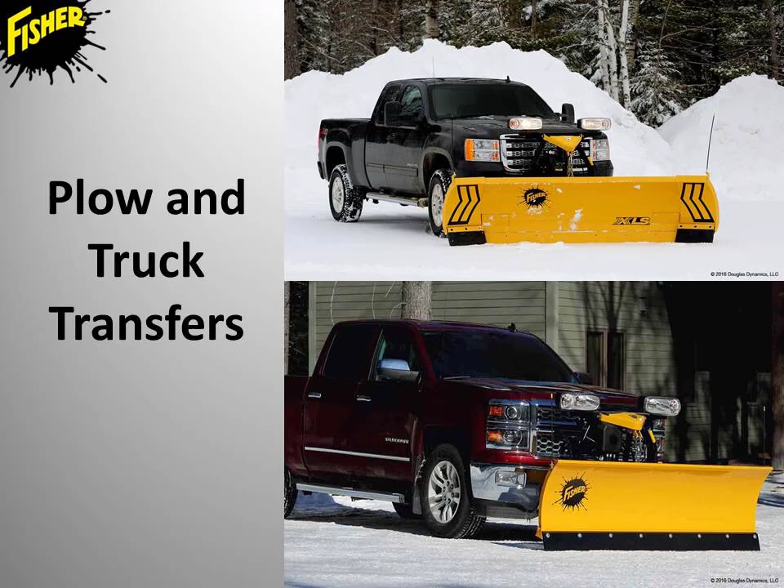Throughout this module, you will learn how to research a plow transfer using the Fisher eMatch system, as well as the many resources available on the Fisher website. This video will cover a wide range of scenarios to assist you with the most common plow transfer situations.

One tool that is helpful and recommended to use during the plow transfer research is our eMatch tool. This tool is located in the upper right-hand corner of the Fisher website.

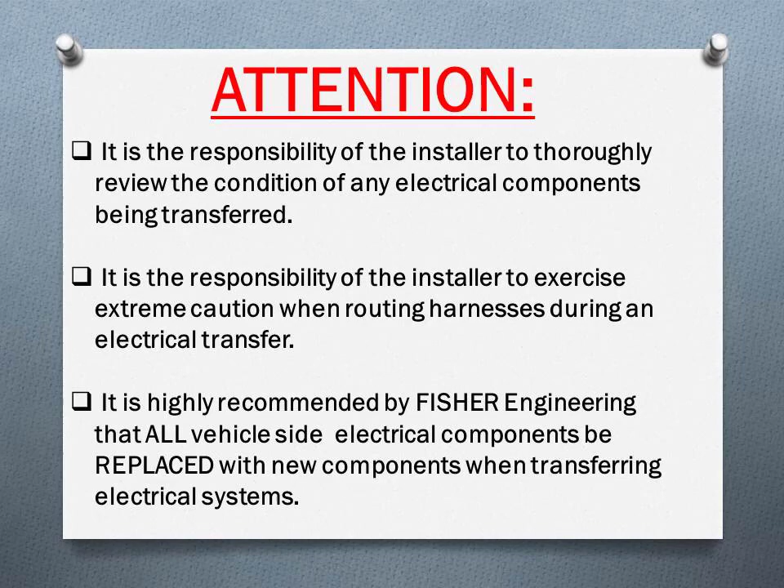It is the responsibility of the installer to thoroughly review the condition of any electrical components being transferred. It is also the responsibility of the installer to exercise extreme caution when routing harnesses during an electrical transfer. It is highly recommended by Fisher Engineering that all vehicle side electrical components be replaced with new components when transferring electrical systems. The components that can vary from truck to truck include the mount, headlamp harness, and isolation module.

Also, due to certain weight restrictions, approved plow applications will vary for each vehicle. It is important to look over these components when researching a plow transfer.

Before beginning, there are a few details you should gather about your snowplow before moving forward. First, it is important to determine what model plow you have, as well as which electrical system it uses.

Questions that you should be able to answer before researching your transfer are: is the plow an original Minute Mount or Minute Mount 2? Please note that a Minute Mount setup will not fit on a 2007 and newer Chevy, GMC, and Toyota Tundra due to the fitting of the headgear to the bumper.

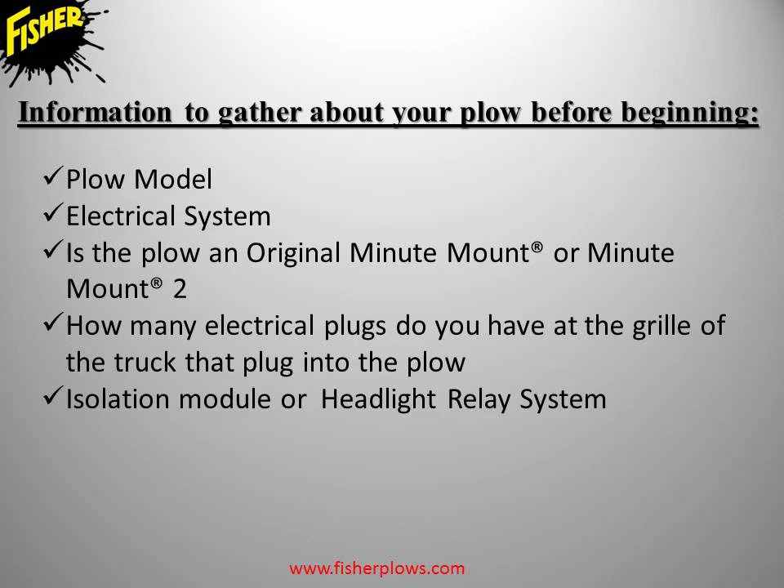Other questions include: how many plugs do you have at the grill of the truck that plug into the plow? Do you have an isolation module system or a headlight relay system? Depending on the electrical system, you will have either 2 or 3 plugs coming out of the grill.

If your system has 3 plugs, it is important to know whether you are using a 3-port isolation module or a 4-port isolation module. A 3-port isolation module has 3 harness plugins, A, B, and C, and the 4-port isolation module has 4. Because the 3-port and 4-port isolation modules differ from each other, they use different headlamp harnesses that are not interchangeable between the two.

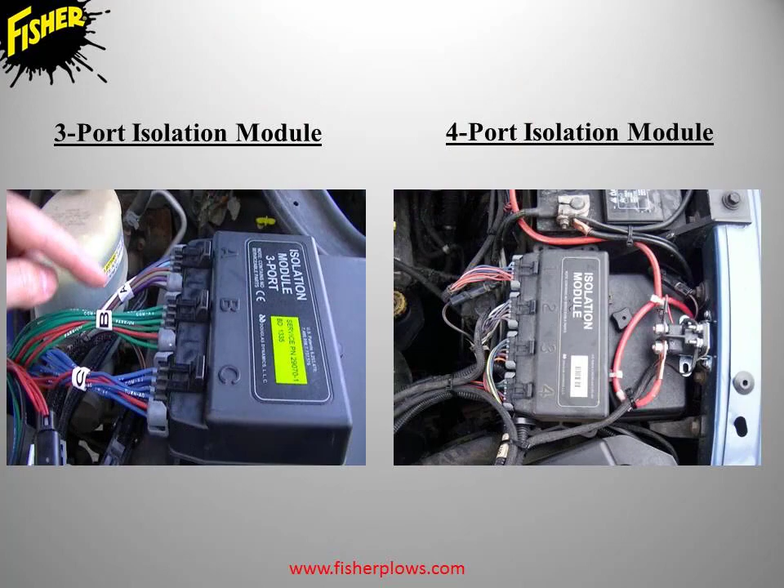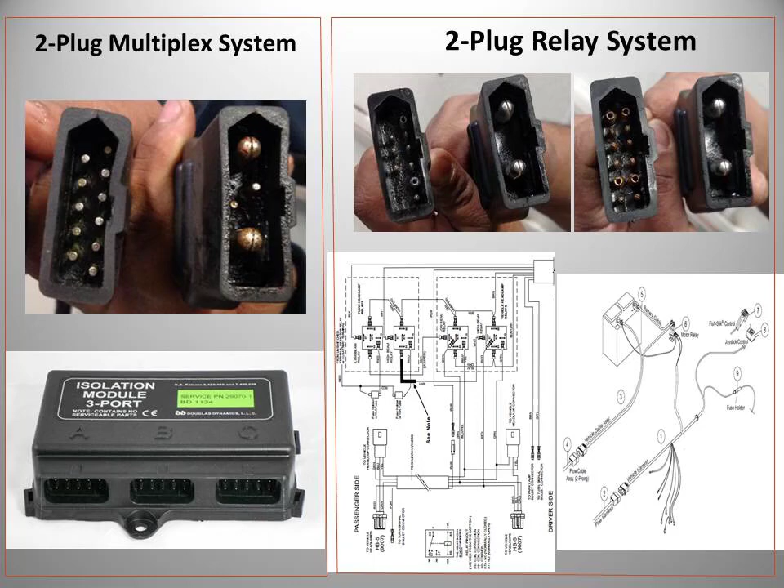If your system has 2 plugs, it is important to know whether it's an older 2-plug headlight relay system or a multiplex 2-plug isolation module system. Some newer trucks with new style lights will not be compatible with the older relay lighting and 4-port module lighting system. In these cases, you will have to upgrade the plow's lighting and electrical system to the 3-port module.

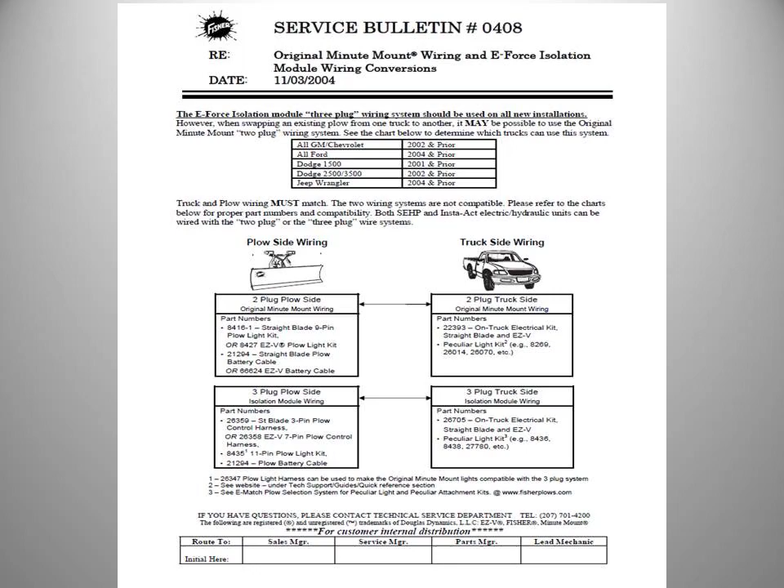Tech Service Bulletin 0408 provides a chart that determines which truck models by year are compatible with the 2-plug relay system. Now we'll go over some of the most common plow transfer scenarios.

Scenario 1: A user has an 8.5 XV2 with a 2-plug, 3-port isolation module system. The user wants to put their plow on a new truck. The plow was originally on a 2005 Dodge Ram 2500 SLT. They want to put the plow on a 2015 Chevy 2500 HD.

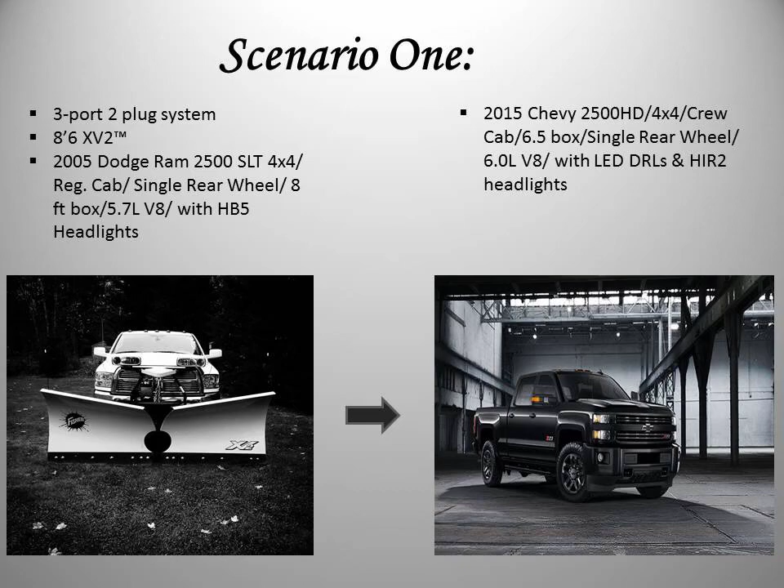This plow transfer scenario can easily be done by using the eMatch system. First, gather the original truck's information and input that information into the eMatch system. When entering the truck's information, ensure that you are checking the build date and weight information of that specific truck, as well as identifying the vehicle's headlamp type.

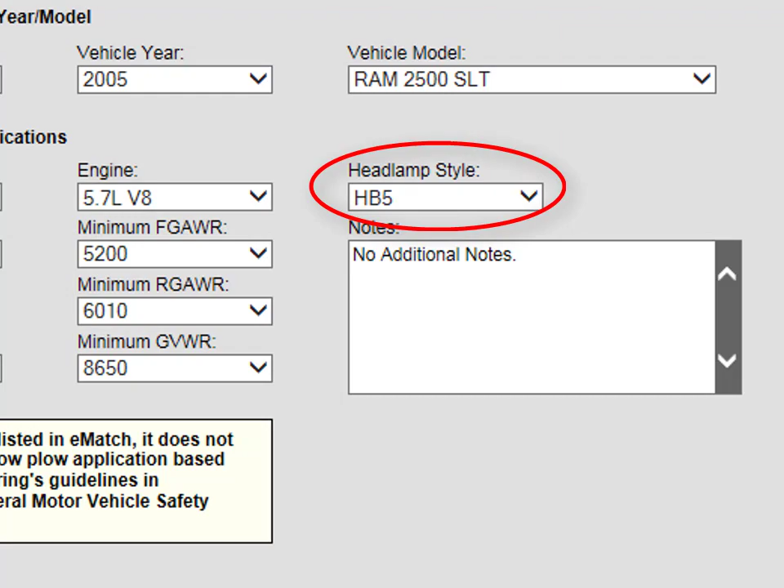After you have entered the original truck's information into the eMatch system, you will be able to gather the part numbers for the isolation module, headlamp harness, and mount. These are the components that vary from truck to truck and may need to be changed.

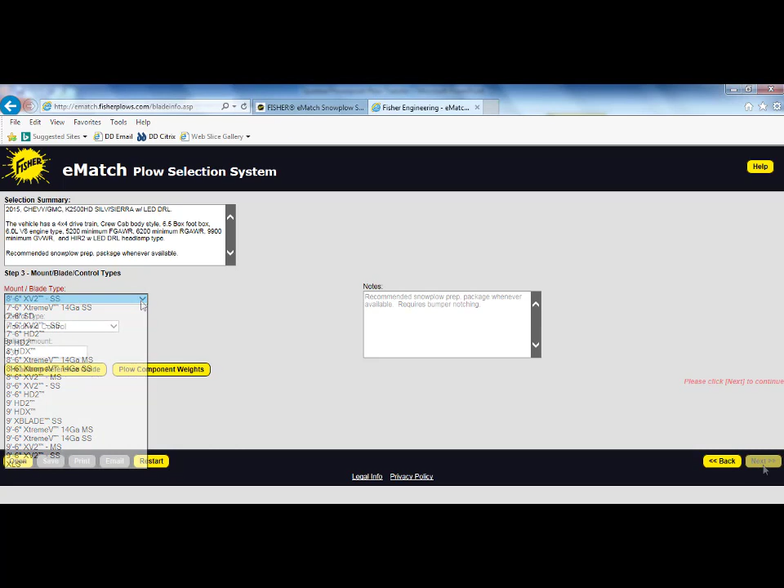Next, enter the new truck's information into the eMatch system. Ensure on the second page that the plow you are going to be transferring is listed in the blade type drop-down. If the blade you are transferring is not listed, then we do not recommend putting that specific plow on that truck. If the blade is listed, then select the blade and control type to move on to the third page.

Check to see if there are any changes in the headlamp harness, module, and mount kit. In this scenario, the module stays the same, but in order to transfer the plow successfully from the 2005 Dodge Ram 2500 to the 2015 Chevy 2500, you would need to change the mount kit and the headlamp harness.

Everything else will transfer over.

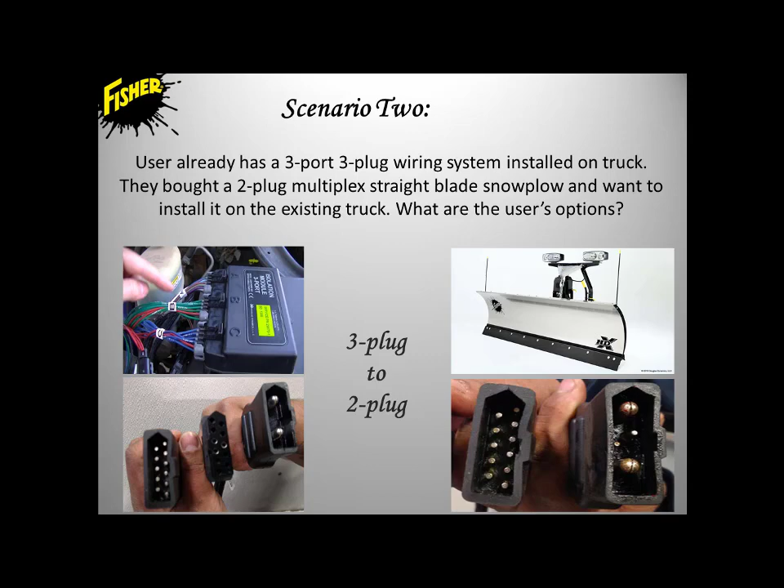Scenario 2: the user has a 3-port 3-plug wiring system already installed on their truck and wants to buy a new straight blade plow that uses the multiplex 2-plug wiring system. This scenario has 3 options.

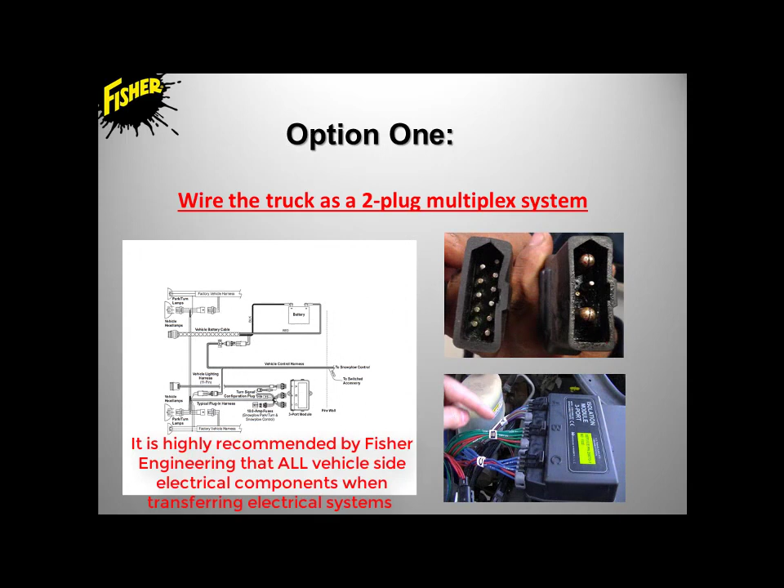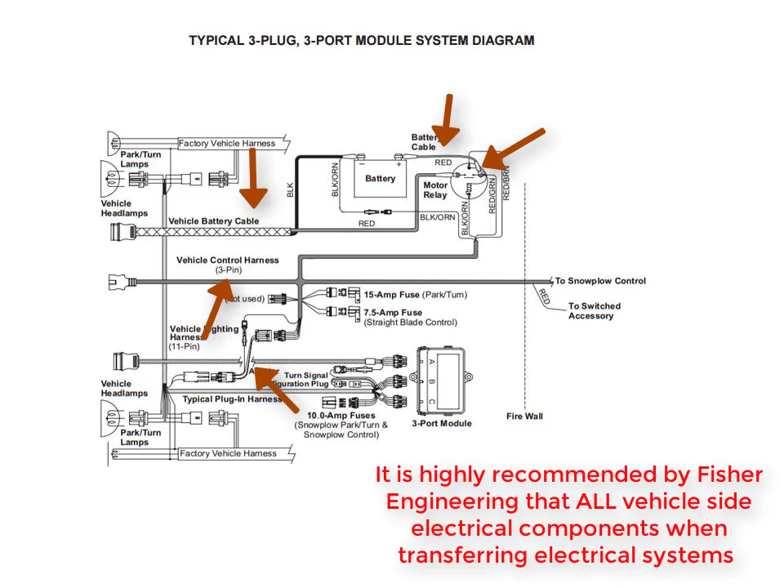The user can wire the truck as a 2-plug multiplex system by stripping some of the vehicle side wiring and installing the necessary multiplex wiring. This option consists of stripping the motor relay, battery cables, control harness, and the 29047 adapter. The multiplex battery cable, control harness, and control would then have to be installed.

The second option would be to use a 49663 conversion kit, which will provide the user with the necessary components to convert the plow side into a 3-plug system. This will make the plow compatible with the truck's original wiring.

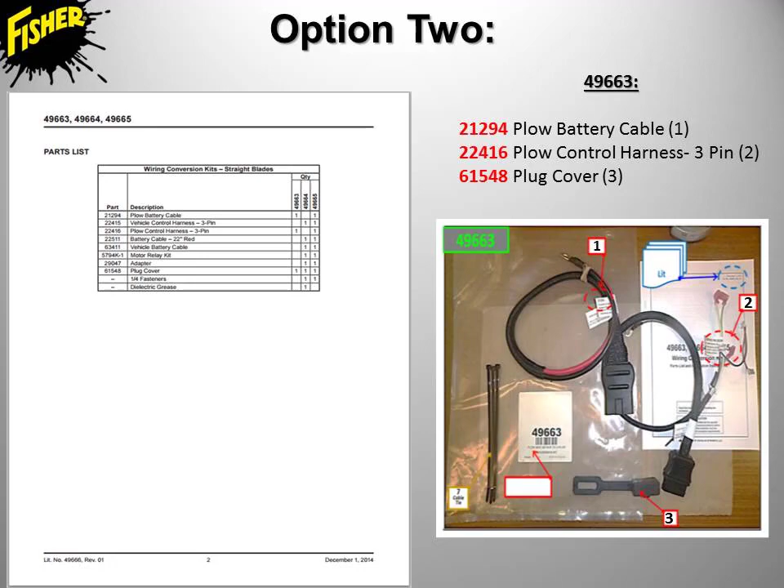The third option is to dual wire the truck. This may be a viable option if you are running both 3-plug and 2-plug plows on that truck.

Scenario 3: the user has a 4-port 3-plug wiring system and wants to take that wiring and plow off of one truck and put it on another. Some newer style headlamps will not be compatible with the 4-port module lighting system, so understanding what type of headlights the new truck has is important.

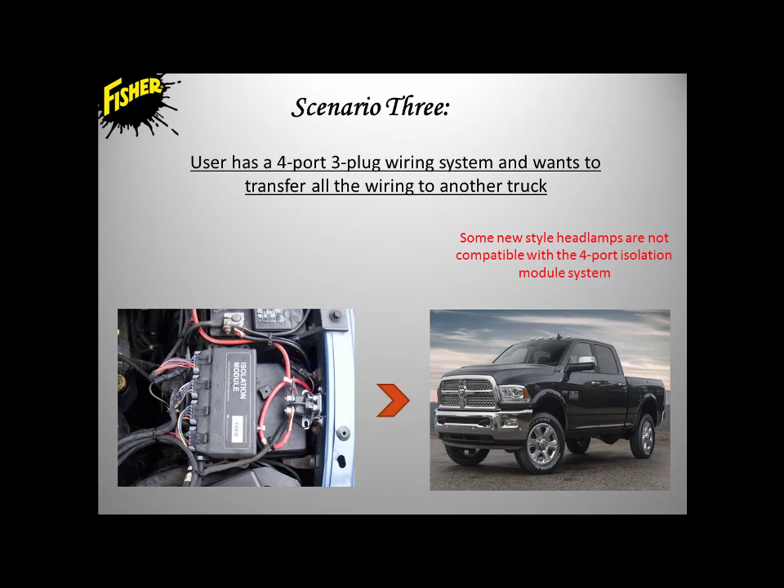If the headlights of the original truck are the same as the new truck, then you will be able to transfer everything over to the new truck. If the headlights differ from the original vehicle to the new vehicle, then we recommend updating the vehicle's lighting system to a 3-port 3-plug system.

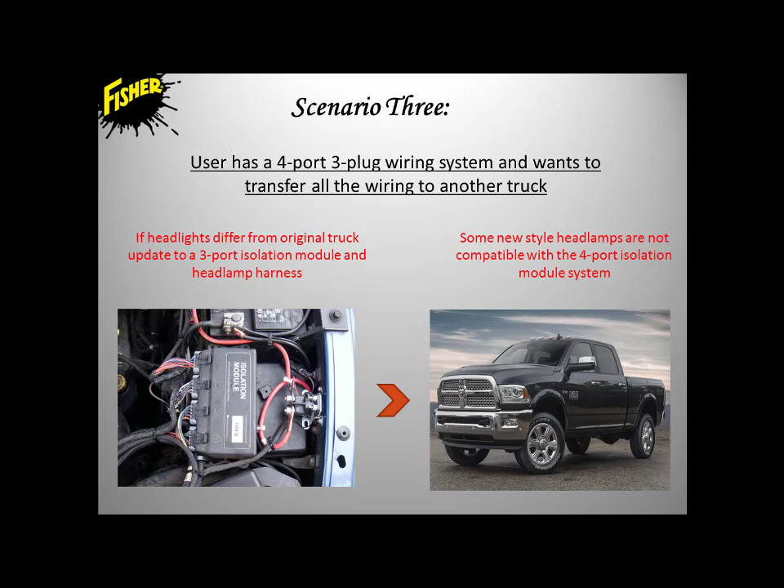This information can be found by inputting the truck's information into the eMatch system.

Scenario 4: the user has a 4-port 3-plug electrical system installed on their truck. The user purchases a new 2-plug straight blade Fleet Flex plow and wants to put that plow on their existing truck that is wired as a 4-port 3-plug system.

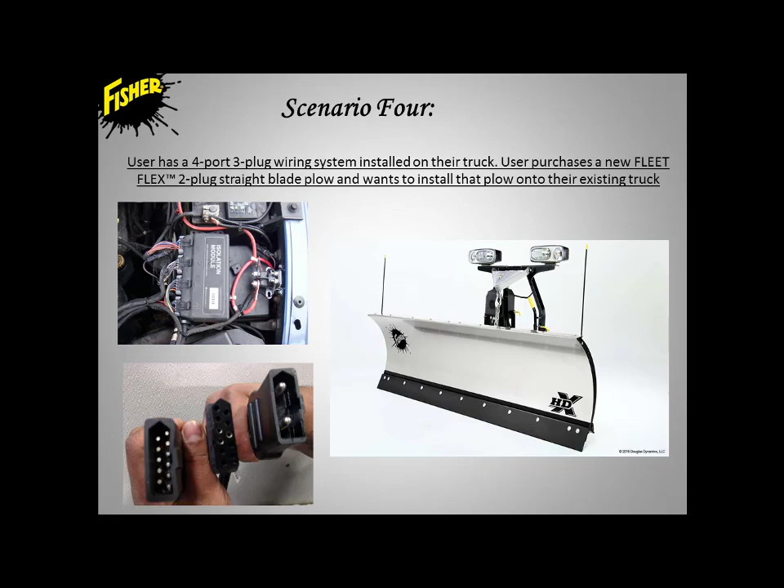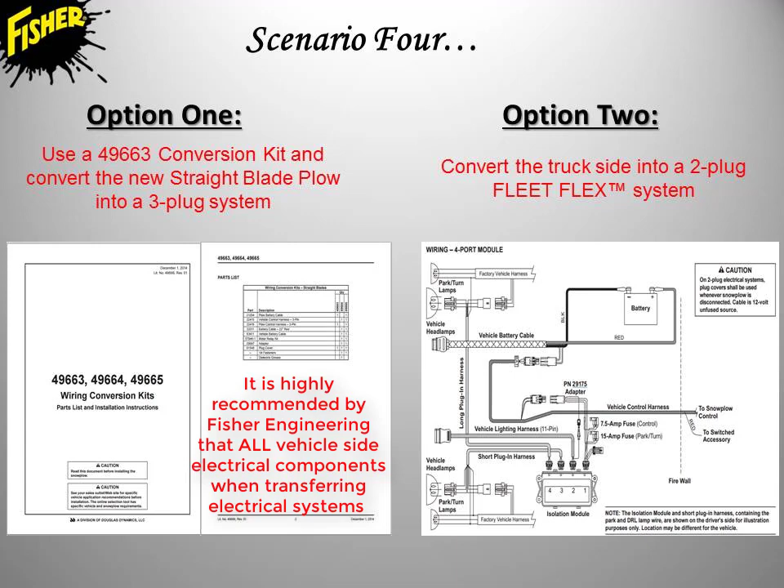In this case, there are two options that can be made. You can use the 49663 conversion kit and convert the plow into a 3-plug system, or you can convert the truck side into a 2-plug Fleet Flex wiring system.

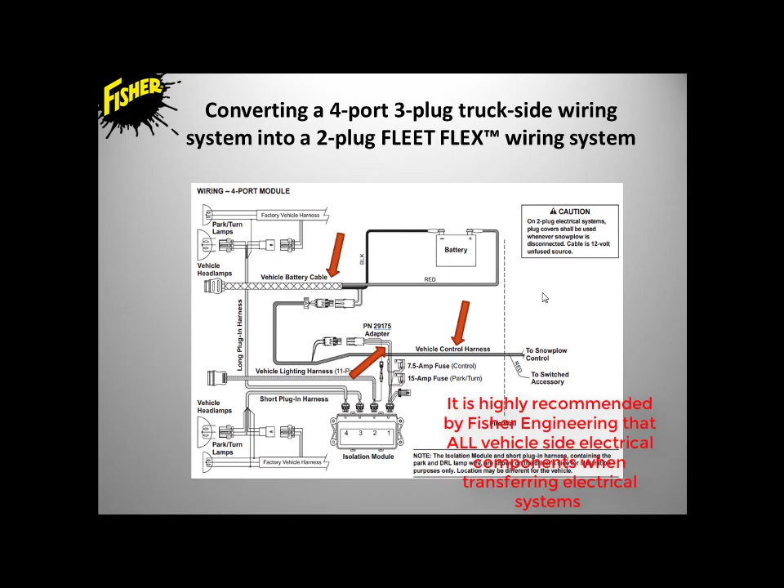Converting the truck side to a 2-plug Fleet Flex system will require you to strip the battery cables, control harness, and motor relay. You will then have to install the Fleet Flex control harness, battery cable, as well as the 29175 adapter. The 29175 adapter will allow you to run a 2-plug Fleet Flex wiring system with a 4-port module.

Scenario 5: in the case that a user wants to transfer a 2-plug relay straight blade plow onto a truck, it is important to refer back to the Fisher Bulletin 0408 to ensure that the truck they are transferring the plow to is compatible for the 2-plug relay system.

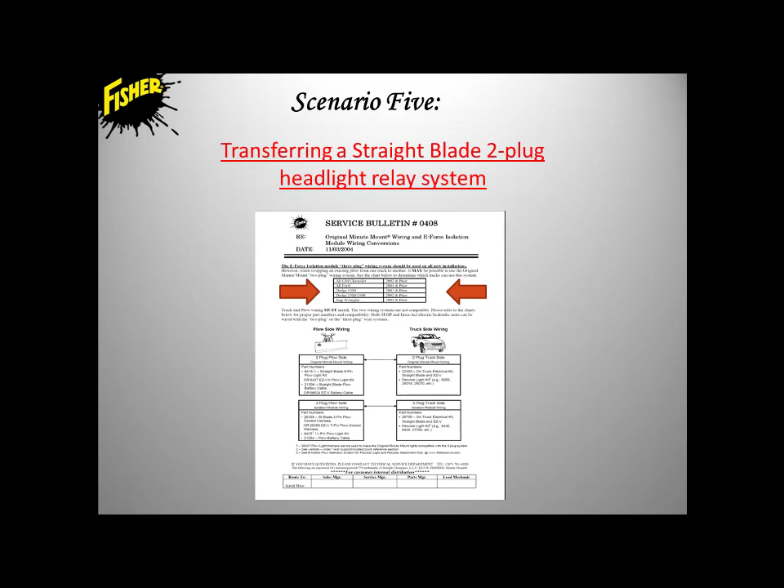In most cases, we recommend updating the plow and truck to a 3-port 3-plug electrical system. This can be done with a wiring conversion kit. A 49665 contains the wiring needed for converting a 2-plug relay style plow into a 3-plug wiring system.

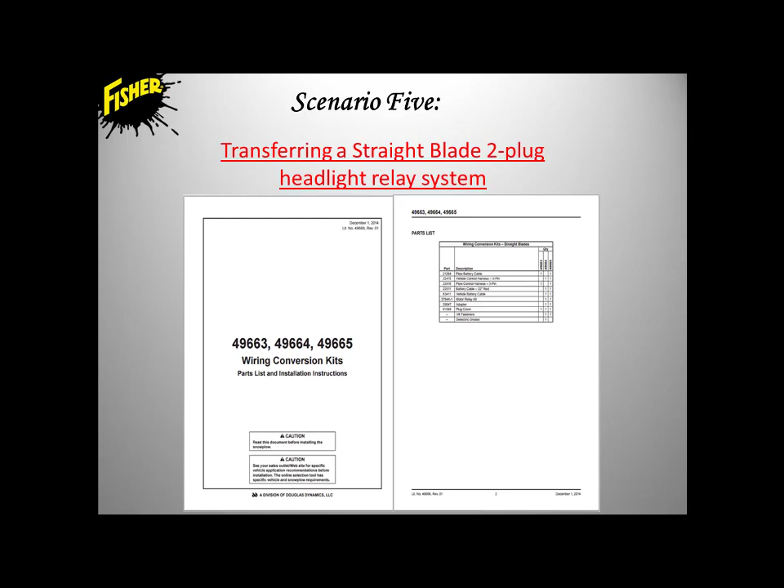This will also give you the wiring needed for the vehicle side, except for the vehicle's specific headlamp harness, module, and customer's preference on control. You will also need to buy the plow side 11-pin lighting harness, part number 26347.

Besides the eMatch tool, another handy tool to reference for a plow transfer is the wiring conversion kit, parts list and installation instructions, literature number 49666, revision 1. This literature contains 3 conversion kits that may be useful for your straight blade plow transfer.

The kits include a 49663, a 49664, and a 49665. A 49663 kit can be used to convert a 2-plug plow into a 3-plug wiring system. This will give the user all the necessary plow side components to rewire the plow for a 3-plug setup.

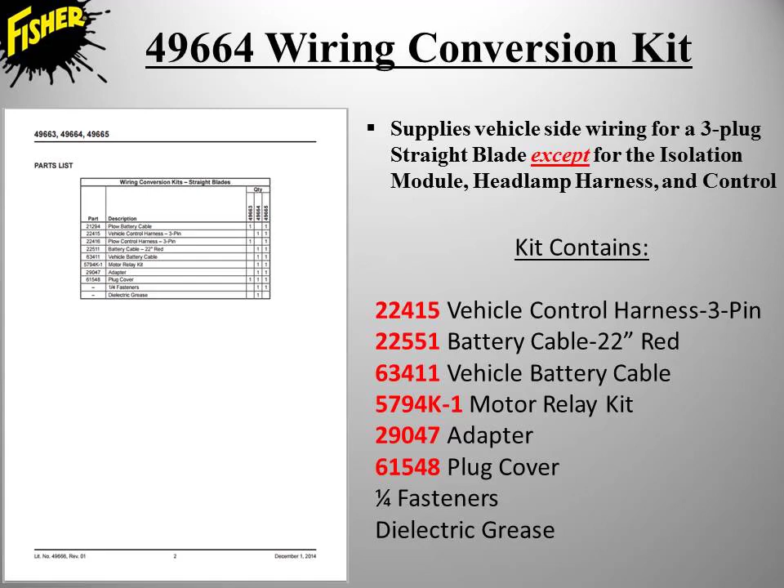A 49664 kit contains all the vehicle side wiring for a 3-plug wiring system. This will supply the user with all the necessary components except for the control, the truck's specific headlamp harness, and isolation module. A 49665 kit contains both the 49663 and the 49664.

This will provide you with both the plow and the vehicle side wiring for a 3-plug wiring system.